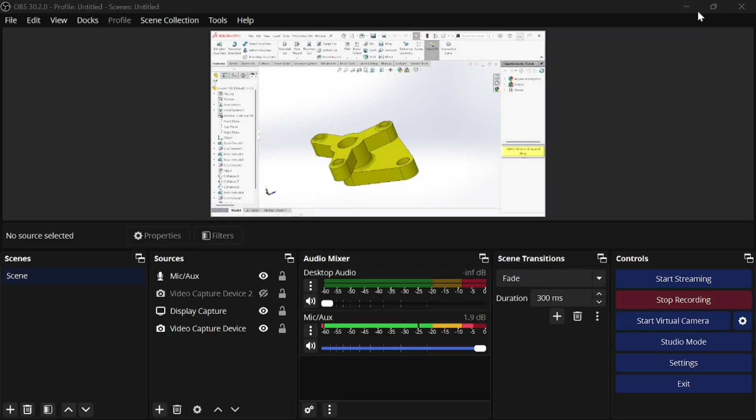Before starting how to make this model, we need to check the blueprint here. Let me show you the blueprint. I already had created a blueprint. This is the model number 108. So now here is the blueprint.

This one is isometric view. You always have to remember that this kind of section view is called isometric view. There's the top view, this is the front view, this is the right view, and this is the top view.

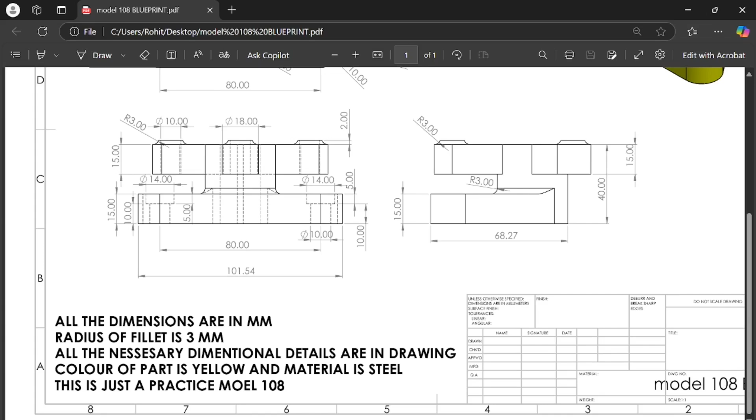So we have to start with the top, and we will create the cylinder whose height is around 40mm. Here all the dimensions are given. Now we need to read this thing all, let me zoom it out. Here all the dimensions are in mm.

Of course, the dimensions that you can see here are in mm. The radius of the fillet is 3mm. Which one is the fillet? Here you see in these 3 points there are fillets, and there is also one fillet here. In this part there is one fillet, and the radius of all this four fillet, 1 2 3 4, is 3mm.

Now the color of the part is yellow and material is steel. So the material that we are going to use for making this part will be steel, and the color that we will select will be yellow. Now let's start the video and let's start how to make this one.

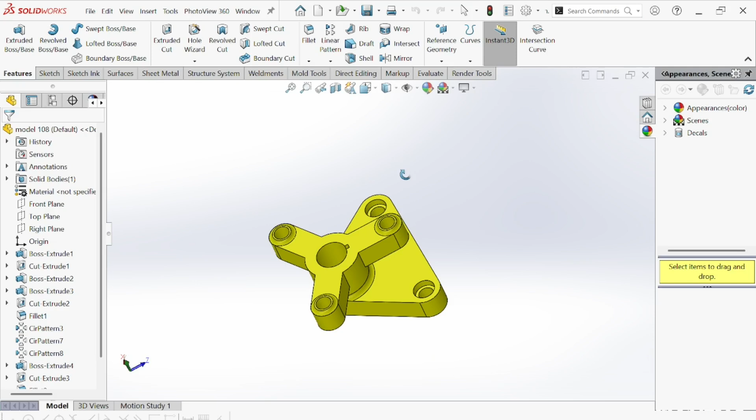So this is the model that I already had created, which I have shown in the starting of the video. So we have to close this one. Simply close this thing. Now we have to create a new one.

I already had told you how you can start a new project. Simply you have to go here, and you can also press Ctrl plus N on your keypad. Okay, so now you have to select the parts.

Now the most important thing that you have to keep in your mind is that before starting any kind of model, you have to work with the dimension. You have to specify a dimension in which we are going to work. So here we are going to select mmgs, millimeter gram and second. There are multiple options for dimensions, so we have to select mmgs, millimeter gram and second.

Okay, now this is one thing. Now we need to select a plane so we can start our project. So we have to select the top plane because we are going to create the cylindrical body first. So top plane and make a sketch.

If you are not able to select the sketch directly from here, then simply go here, click on the top plane, go to sketch, and here is the option for sketch. Simply you have to click on this option.

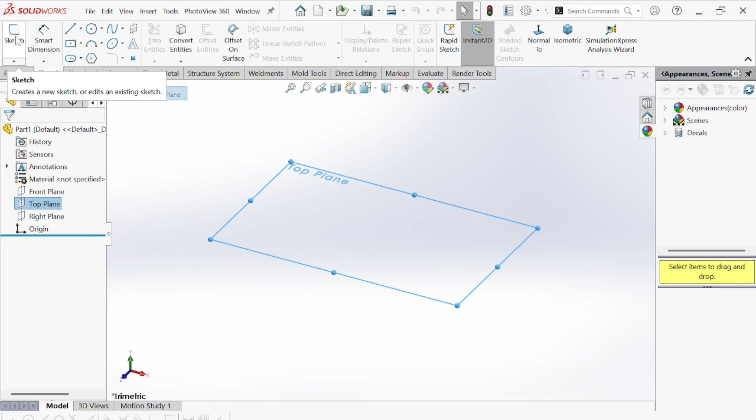Now here you see, now we need to make the cylindrical part. Here is the cylindrical part. Let me zoom in. Yeah, this one, and the height of this part will be 40mm.

But here you see, the cylindrical part, we have to make two circles, this circle and this circle. So the diameter of this circle - here the radius is given as 17.50 - so we will have to take the double of 17.50. So we will do some multiplication, and the radius of this one is 10mm, so the diameter will be 20. Okay, so let's start doing it.

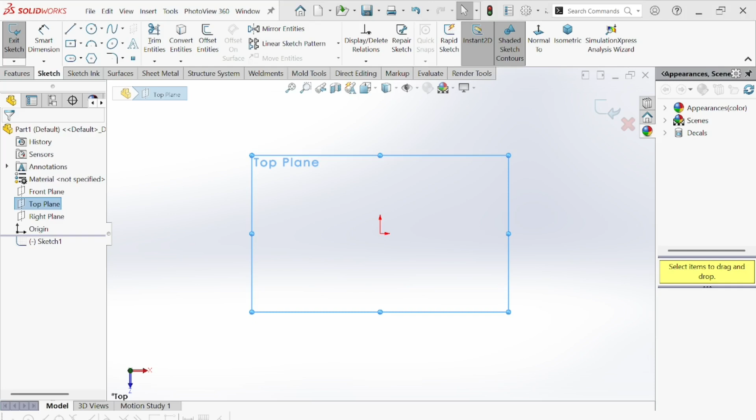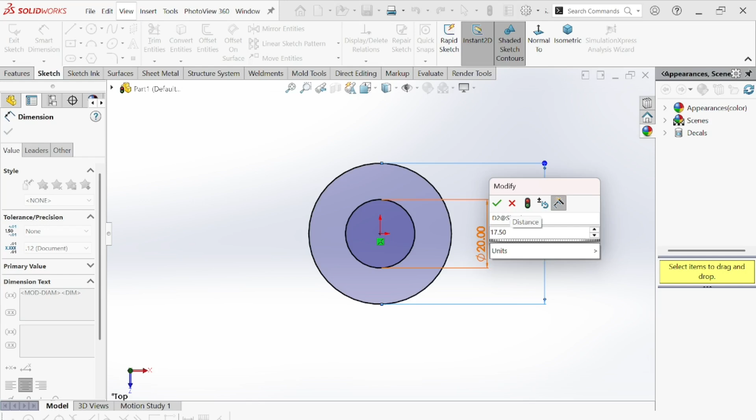Start to make two circles. Make this one 20, simply make this one 20. Now define the diameter of this one. The radius of this one here, see, this arc is 17.50, so simply make 17.50 into 2. Okay, and make this done. Here you see, 35mm.

Okay, now we need to extrude this thing, make a cylindrical part. So go to surface.

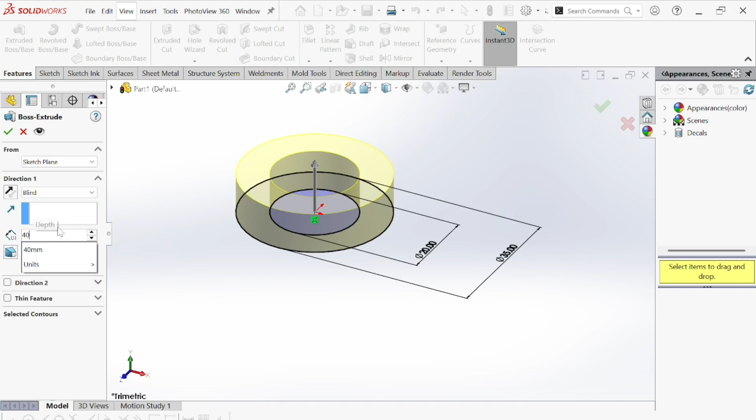Now go to extruded boss. Simply go to extruded boss, and here you can do two things: you can select mid plane, or you can select blind. Simply select blind and make this one 40. Now here you see this one is 40, extruded around 40. Simply make this one okay.

Now here you see our main profile is done. Now we need to make three parts, these three parts, and come down. The dimension of these three parts are given. So first we will do this one.

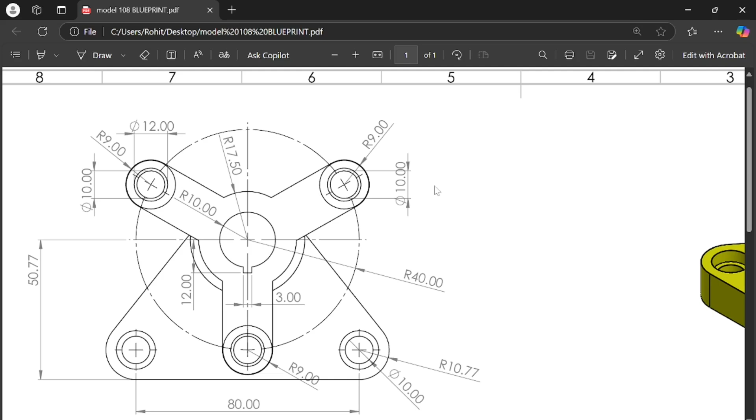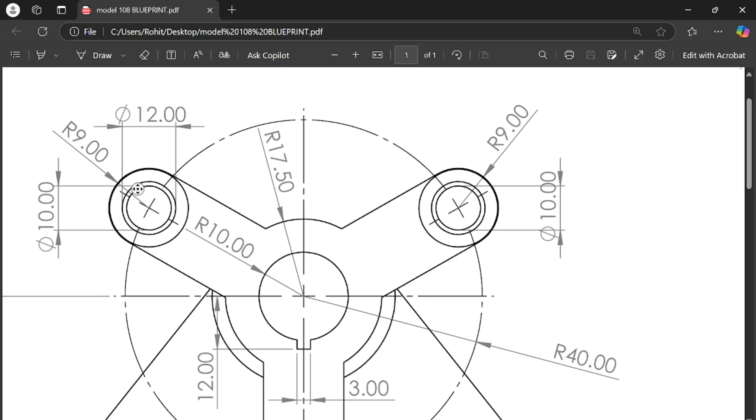Now here you have to do one thing. Let me zoom in. The radius of the outer curvature, this outer curvature here, two arcs, the radius of the outer curvature is 9. So we have to make this one as how much? 18. Okay, 9 plus 9 is equal to 18. And the diameter for the internal circle, which we are going to use as a hole, will be 10 mm.

Okay, so better to start with here. Let me zoom it out. Better to start with here, and then after this we will mirror this thing in three parts. Okay, so come here.

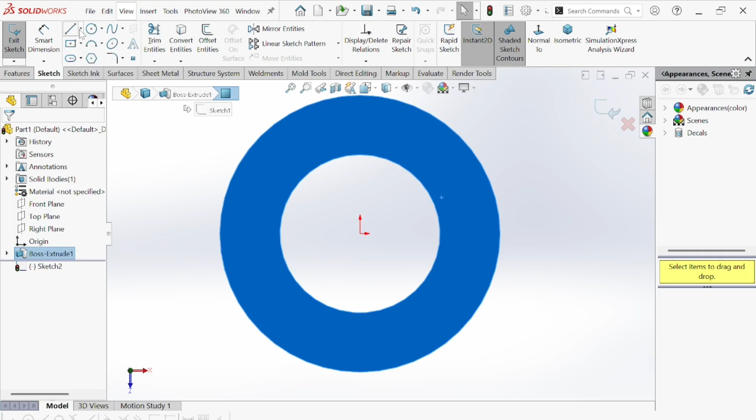Sketch. Now select center line, make a center line like this. Give the dimension of this center line.

The dimension of this center line is how much? Let me zoom it out. Here you see, we have to here you see, this construction circle shows you the dimension of this arc.

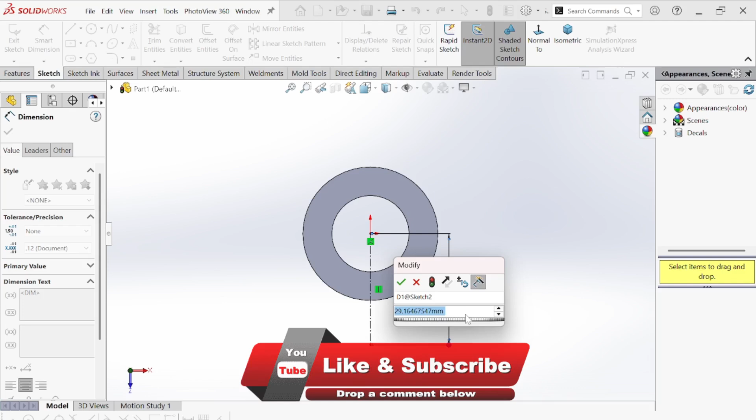Okay, so we have to take this one as 40, 80, because here you see radius is 40, so we have to make double of it. So we will take it as 80. Okay, so make this one 80. Let me check. It's going backward. Let's make this one 40. Okay, better to make this one 40. Let's make this one 40.

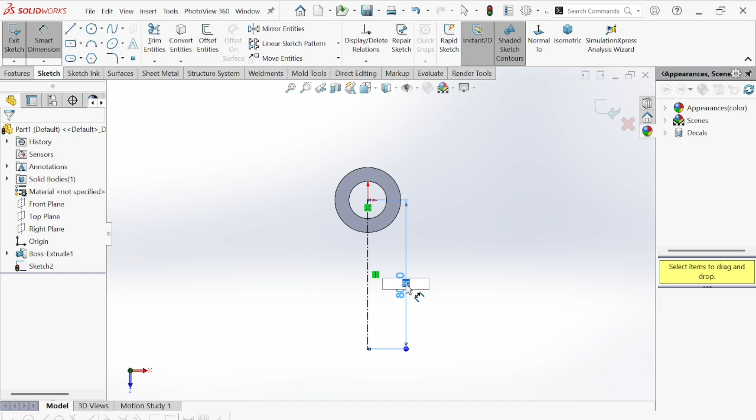But first let me check if any kind of dimension is given or not. So let's take it as 40. Simply take it as 40. Here you see this 40 is fine.

Again we need to make two circles, one circle and one more circle. Okay, now come here. The diameter of the internal circle will be around 10 - why? Because it is also given in the drawing. Here you see the diameter for the inner circle will be around 10 mm, and the diameter for the outer circle, this arc, the radius of this arc is 9, so we need to take double of it - 9 plus 9 is equal to 18. So we will take this one as 18. Okay, and make this one okay.

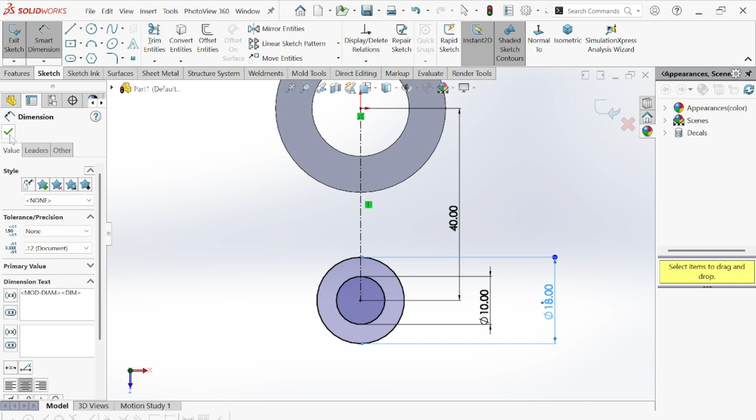And come here, select, click here. Now it gets turned into blue. Simply convert this as entity. We can also make a circle manually, but it's better to make this one as an entity.

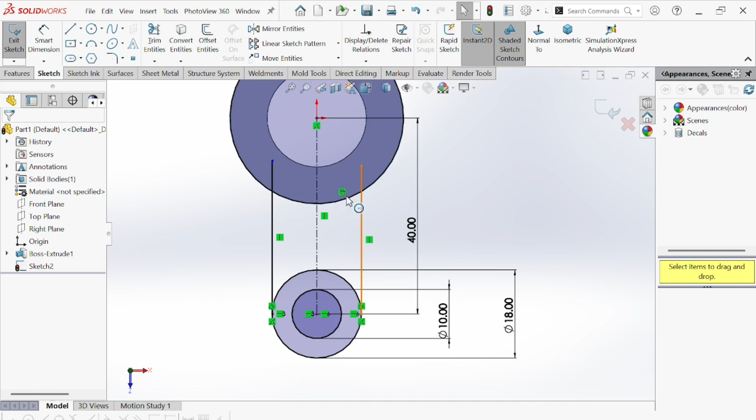Okay, now again come here, start from somewhere from here, this yellow point, make a line, make sure that the line will be vertical. Again make one more line, or you can simply mirror this thing. Why to mirror? Simply make this one. Now here you see, you have to make sure that the line will go inside of this circle.

Now here we need to trim some parts. Simply trim this part and also trim this one. Now here you see it get trimmed.

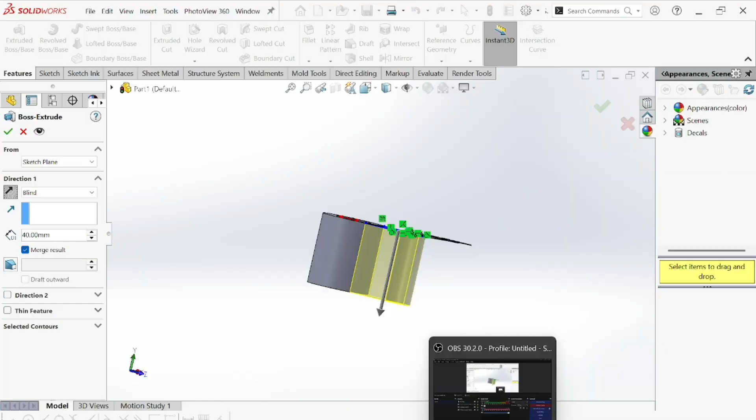Go to feature, go to extrude boss base. But we need to extrude this one in backward direction. Simply change the direction. And how much we need to extrude? Come here, we need to extrude this one around 15 mm. So make this one 15. Okay, and make this one done. Now here you see, why 15? We need to extrude this one around 15 - the thickness of this part is 15.

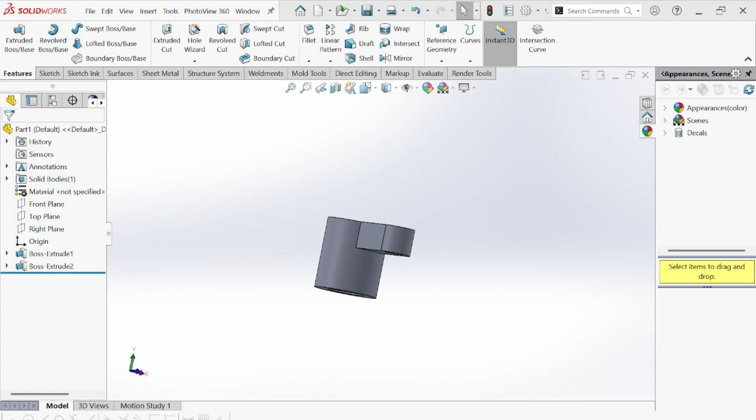Okay, now we need 3 copies of this part. Okay, so come here, but first let's make a sketch. Let's make some more things on it. Simply come here, find the origin point of this circle and make a circle like this.

Bigger than this circle. Now come here, and here you see the diameter of this circle, the middle circle, is 12 mm, and how much we need to extrude this thing? Around 2 mm. Here you see 2 mm. So 12 and 2. Come here, make this one 12.

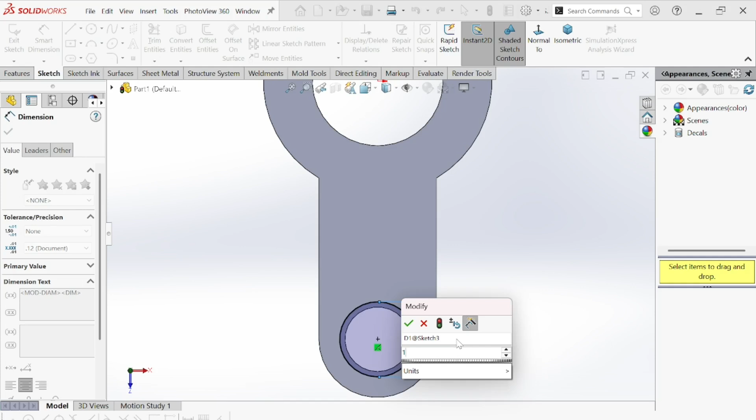One more circle. Otherwise, we need to go and select extruded cut. We need to make a hole here. So better to make a circle right now. Now no need to define the diameter of this circle, because there is already a circle here. We just needed a copy of this circle.

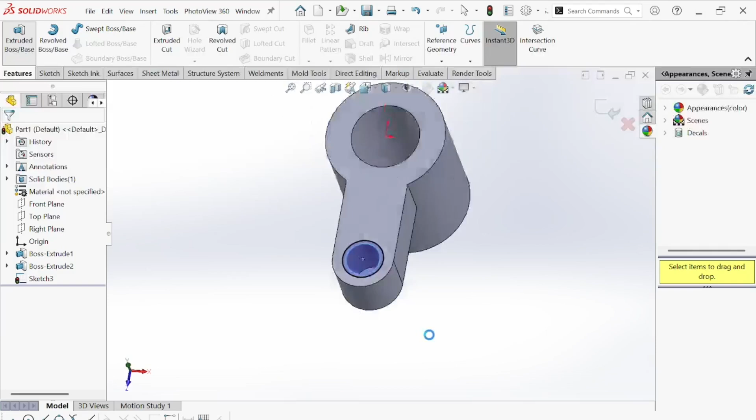Now go to feature, go to extruded boss, and how much we need to extrude? Simply give dimension 2 mm and make this one okay. Now here you see, no need to do anything. Simply come here, we need 3 copies of this thing.

Here you see 1, 2, 3, 1, 2, 3. So we need to make 3 of it.

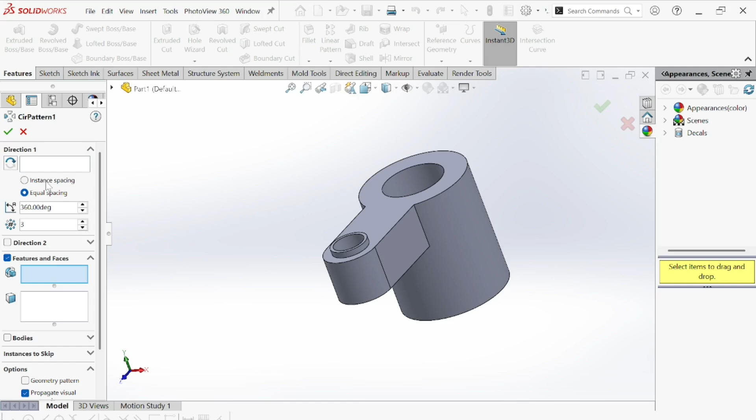So in the feature section, you have to go to circular pattern. Simply go to circular pattern, select this one, go to direction, select this one. Here you see, and also select this one, and go to extruded boss base, and also select this part. Now here you see, everything is done.

Simply make this one okay. Now you see. Now let's make the fillet here. Go to fillet and set the radius of the fillet. How much was the radius of the fillet?

The radius of the fillet is 3 mm. So give dimension 3. Select this one, select this corner, and also select this corner, and make this one okay.

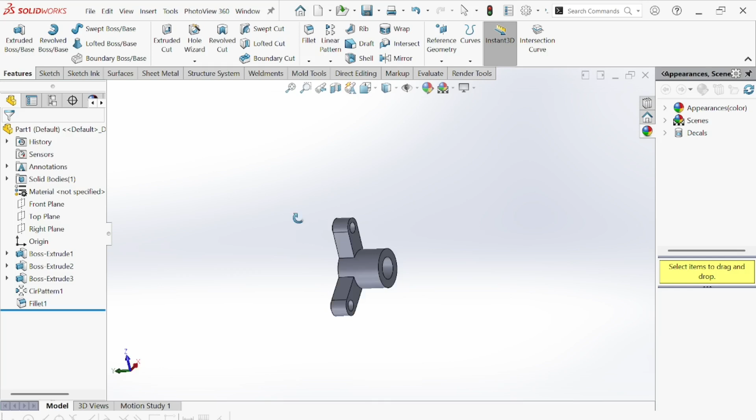Now here you see the upper part is ready. Now we need to make the lower part. So how? Now we will start from here. Simply select this part, click here, and make this one a sketch.

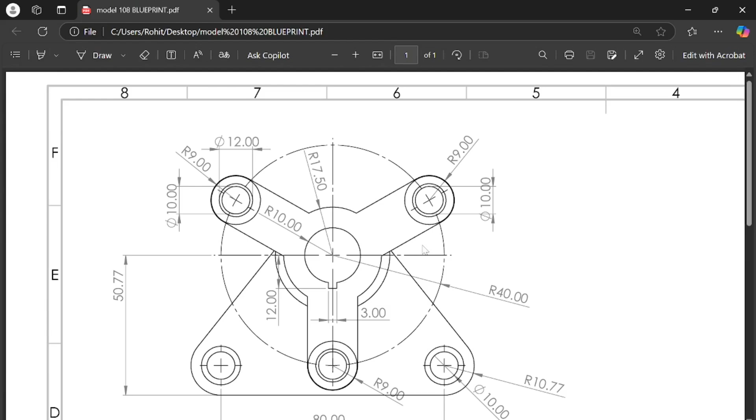Everything is done. Let me do one more thing. And yeah, this one looks perfect. Now what do we need to do? We need to make this part, this profile.

Okay, simply convert this as entity. Come here, select construction line, drag it down.

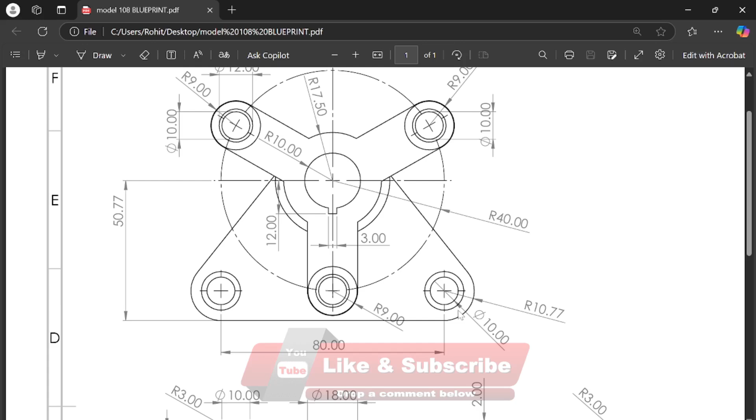Now what do we need to do? We need to define the overall dimension, right? The overall dimension - so the overall dimension is how much? It's 50.77. Here you see 50.77, and here you see...

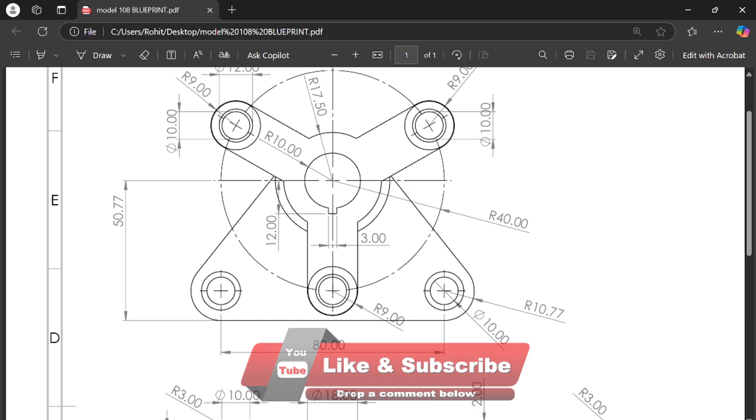50.77. Let me do one more thing. 50.77. Yeah, here you see the radius of this one is 10.77. So we need to minus 10.77 out of 50.77, so it will automatically become 40. So the actual dimension from the center point to this point is around 40 mm, right?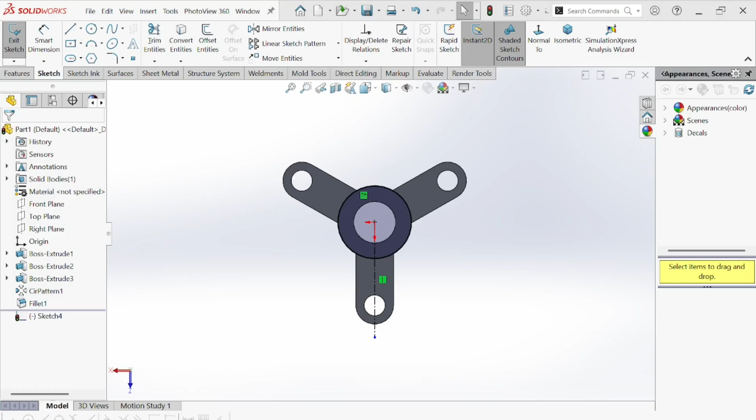40 mm. So come here, give dimension 40 mm, simply means 40. Okay, again one more thing we need to do.

From the center point, make a left or right one more circle, one more line. Now what do we need to do? Here you see the overall dimension, the main gap between this center point and this center point is 80.

So we only need to take half of it, so we will take it as 40. Here you see 80, we need to make half of it, so we will make it as 40, right?

So come here, dimension, make this as 40. Okay, now again we need to make one circle, right? So now the radius of this arc is 10.77.

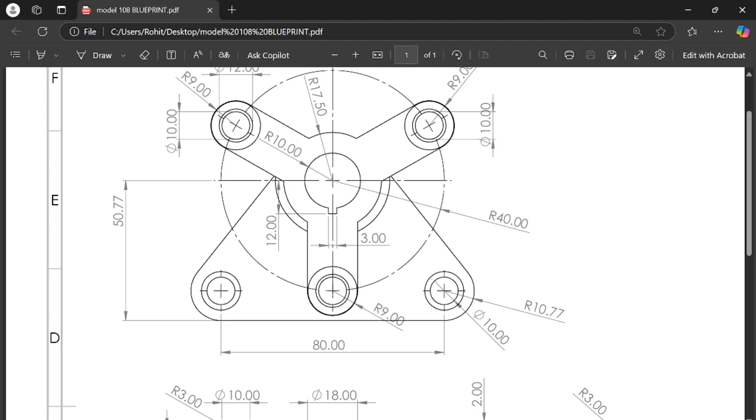So we need to make double of it. So what is the double of it? Let's calculate. Come here, dimension, smart dimension 10.77, right? So 10.77 multiplied by 2, and done.

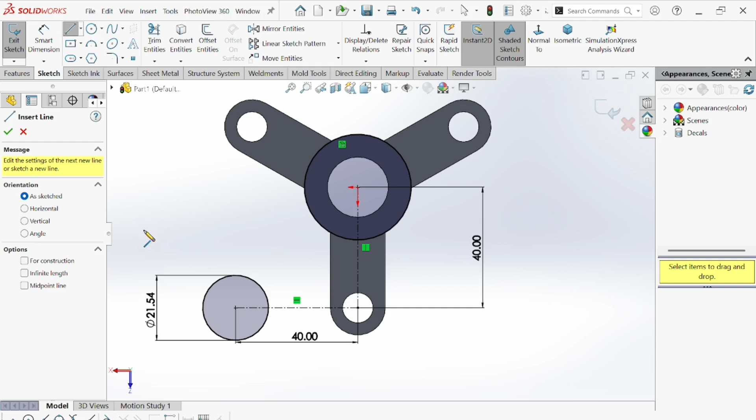21.54. And again, come here, select geometry line, start from here and touch it somewhere here. Now here you see the relation is already done, which is tangent. Here we already have one relation done, which is tangent.

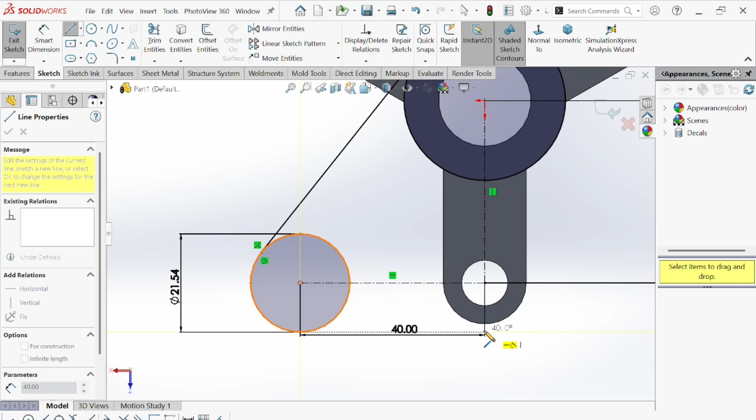Now no need to do anything. Just from this point, make a line like this, which connects exactly in the middle of it, and make it done. You can also drag it here.

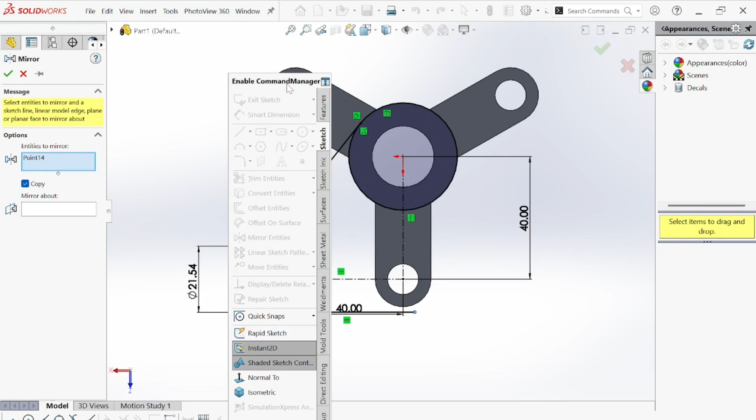It's absolutely fine. Now we need to make a copy of it. So how? Go to mirror entities. What's wrong? Something's wrong, something's wrong.

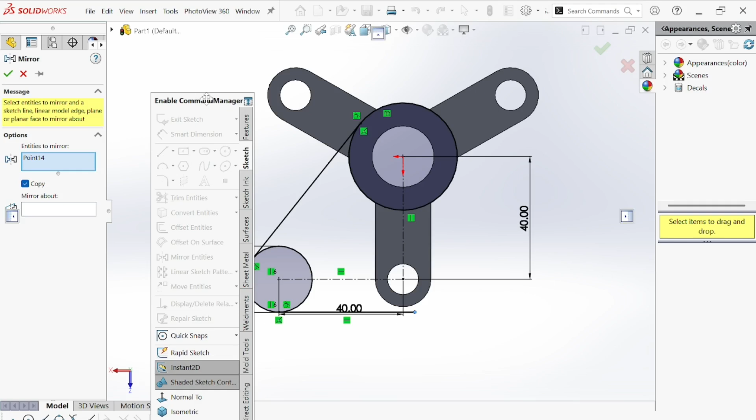What happened? Feature, sketch, feature, sketch. Let's put it here. Okay.

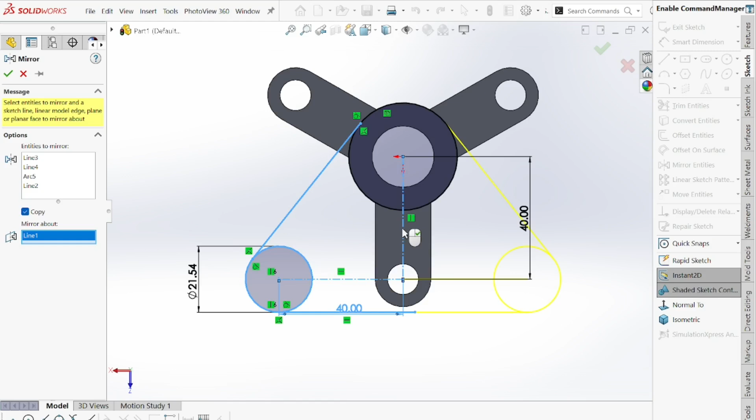Now again, select everything. Okay, go here, find in a sketch. You have to find mirror. Simply find mirror, go to mirror about, select this center line, and make this one okay. Now here you see everything is done.

Now again come to trim entities. Trim this thing, trim this thing. Trim this one, trim this one also. Now trim - I think trim this one.

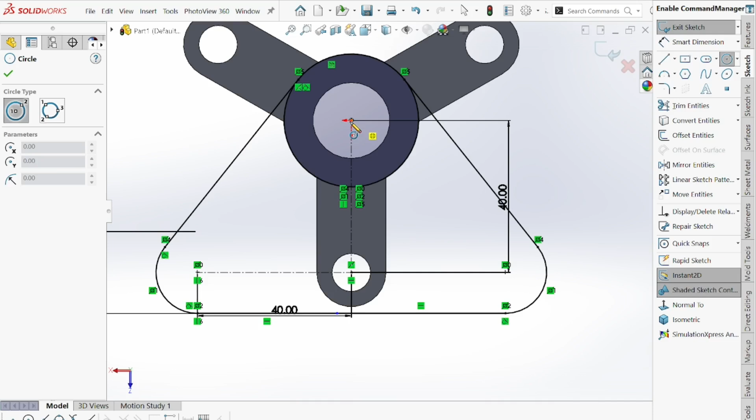Now again select line and connect this line to this line. Again we need to do some more things. Go to circle with the center point, make a circle here, right? Now trim entities and simply trim this thing. Now everything is done, make this one okay.

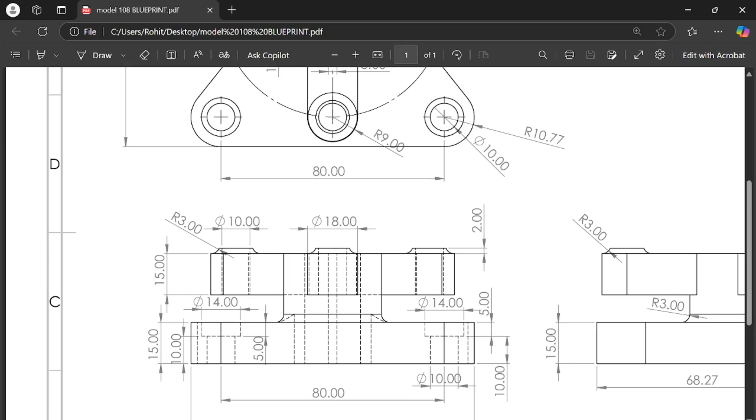Now go to feature and select extruded boss base. And how much do we need to extrude? Change the direction, and how much do we need to extrude? We need to extrude this one around 15 mm, also in upward direction. Okay, in upward direction, so give dimension 15. Okay, and make this one done.

Now here you see. Now we need to make holes here. But let me do one thing. Now we need to make two holes here, right? One here and one here.

So I'll go to the feature section, go to hole wizard. This time you have to select the first option. Simply select first option.

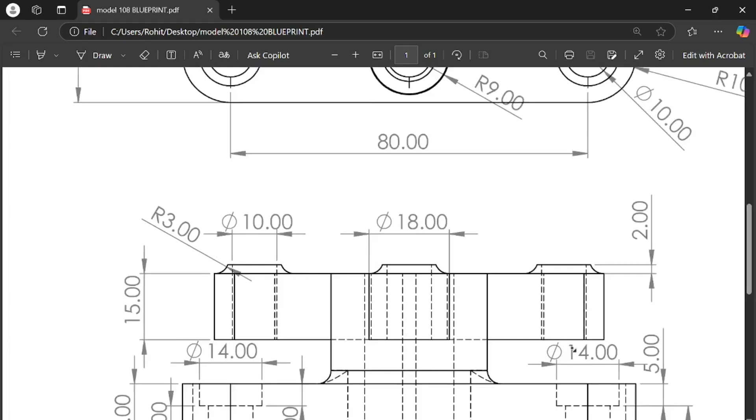ISO is fine, so you have to keep it ISO. Now come here. The diameter of the hole is 10 mm. Let me zoom in so you can see it clearly. The diameter of this hole is 10 mm. Okay, so go through all.

Select M10, not M5. Now, head clearance - how much was the clearance? It's 14 mm, and the depth of this part is 5 mm.

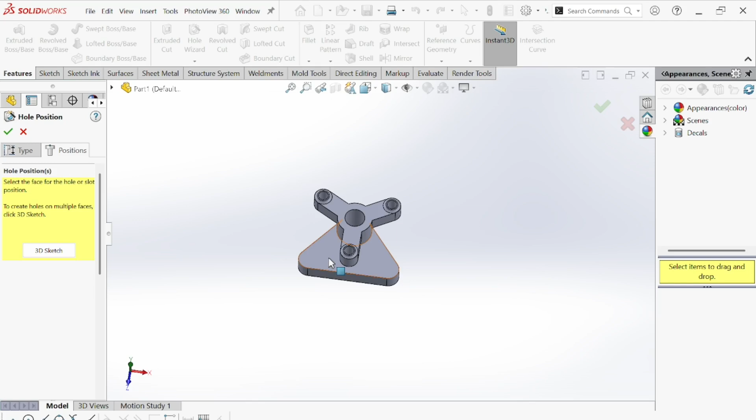Now go to position, select this part, make this one here and this one here. So this is wrong. Let me try it again, otherwise we will do it manually.

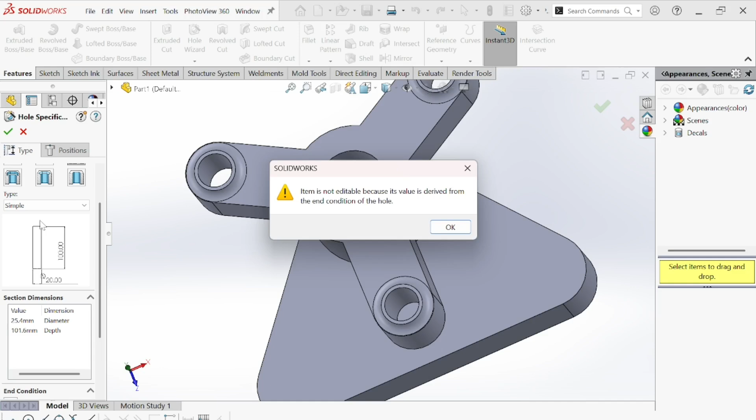Go to hole wizard. Let me select this one - this sixth option. Now here you see, through all, diameter - come here. Depth, simple C-size drill. Here you see multiple options, tapered, but let me select this one. Now here you see, I think this option is fine.

M10, head clearance, make this one 5. And this one make 14. Here you see, under head countersink 90. This time let me try.

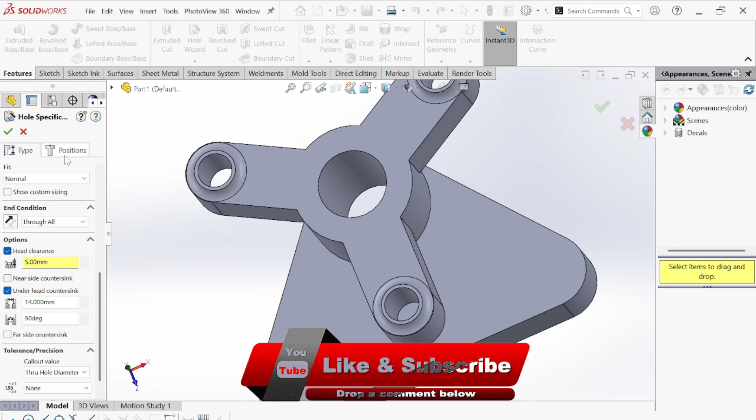Go to position, select this one. It's again happening like this. So okay, let's do it manually.

Go to hole wizard, select this one. This one has diameter 10. Position this on the face, find the origin point of this arc and also the origin point of this arc, and here is a hole. Make this one done.

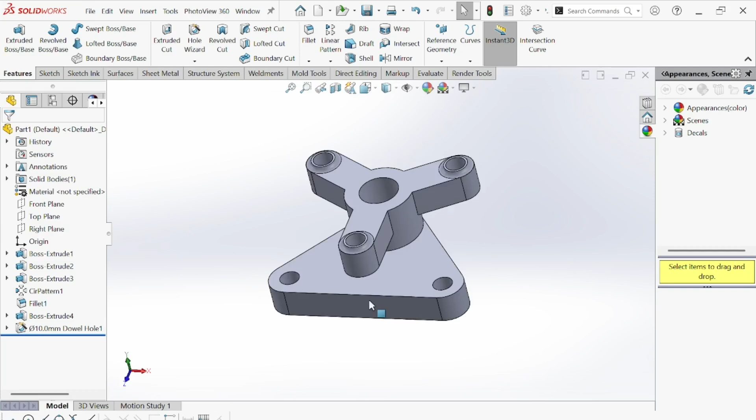Now here you see, again go to hole wizard, again this third option. This time we will take it as how much? Okay, let's leave it, let's do it manually.

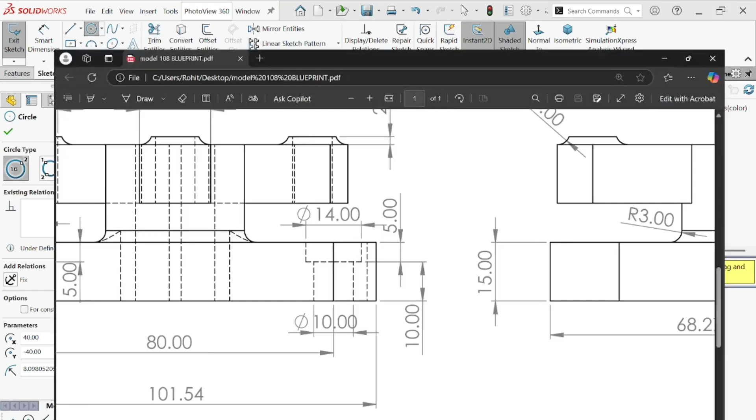Again, come here, find the origin point of this circle, find the origin point of this circle also. Now here you see the gap of this thing is 14 mm here - the diameter of the head is 14 mm, and the depth of this head is 5 mm. Okay, so make it okay.

Select both the circles, make relation equal. Through this, you can define the diameter of every circle. Here are two, but you can also use this for multiple circles. Now go to smart dimension and make this one 14.

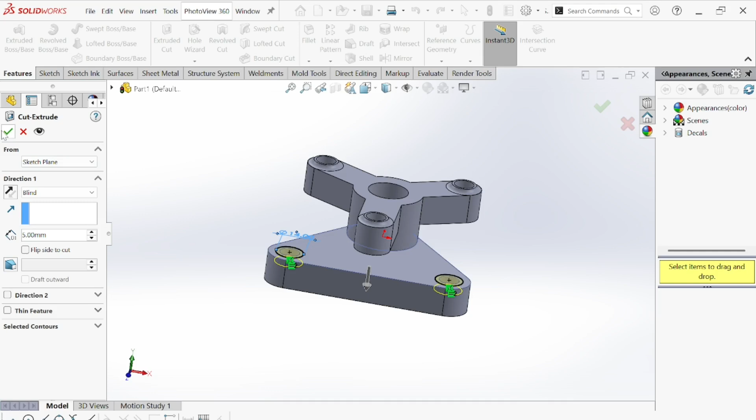Go to feature, go to extruded cut, and how much? This is not 5, just make it 5, and make this one done. Now here you see, here is the part.

Now here we need to get the fillet. The radius of this fillet is 3 mm. So go to fillet, 3 mm, select this corner and make this one okay. Now here you see, it's done.

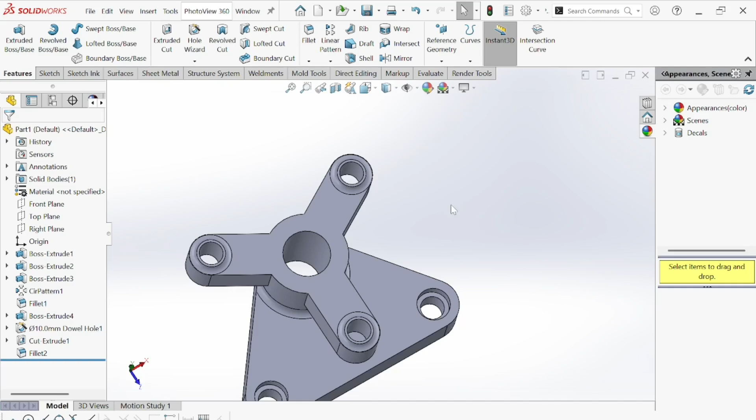Now we need to make this keyhole here. So again, you have to find the center rectangle. Select center rectangle, find a point here. Here you see this point. Make a rectangle like this.

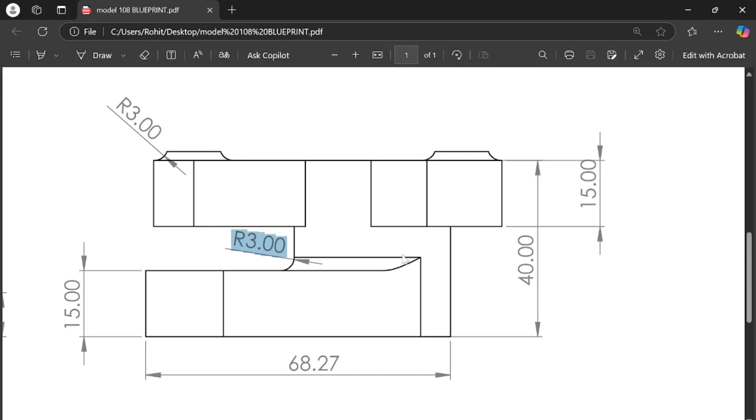Now we need to define the dimension. So select this point, select this line, and the dimension is - let me zoom it out. Here you see 12 mm.

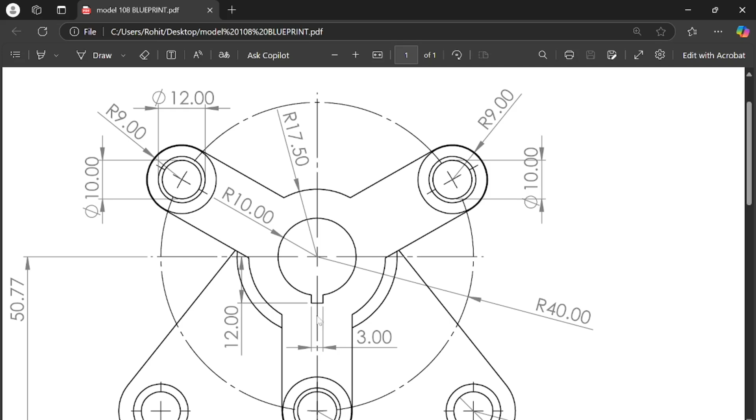From the center point, the dimension of this line is 12 mm, and the thickness of this part, from this line to this line, is 3 mm. Okay, so make this one 12 and make this one 3.

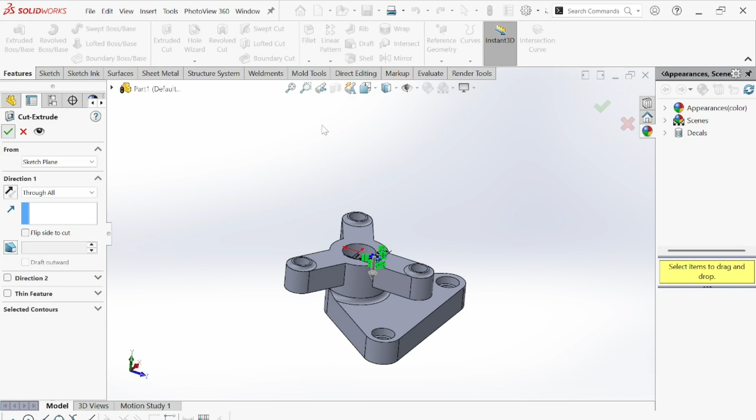Simply go to feature, go to extruded cut, and this time you have to select through all, not blind. Simply select through all. Now here you see, and make this one okay. Now here is our final model.

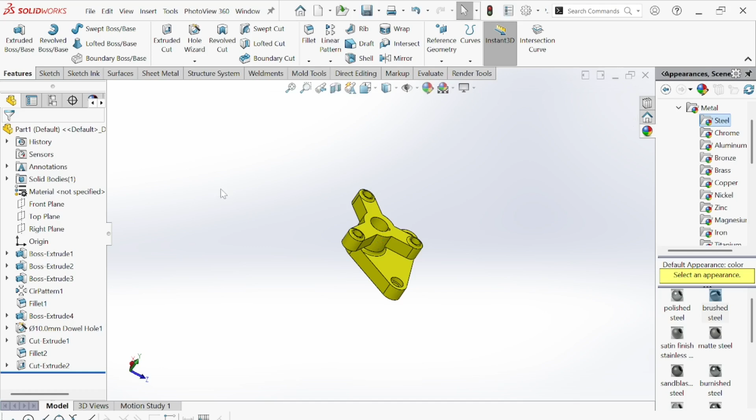Now let's select material. Go to metal, steel, select this steel, go to edit appearance and give it material yellow. Now here you see, done. So here is the final part.

Here you see, here's our final part. So I hope that you liked the video and enjoyed it. This is just a simple practice model.

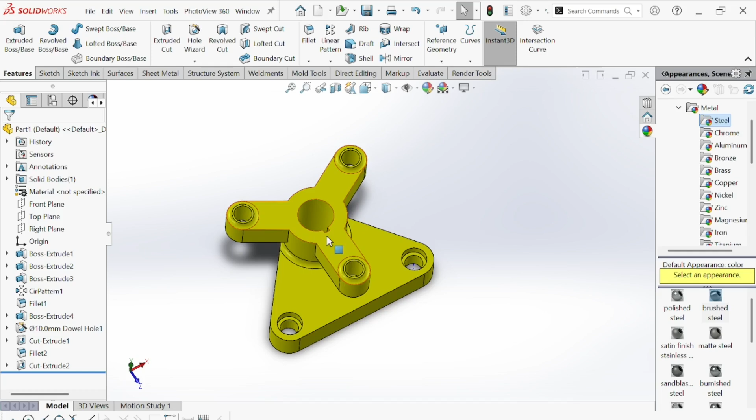No need to worry about a lot, you can also practice it on your own. This is a simple model in which I used multiple tricks. Actually, I got some problem making this hole, but I did it manually. You can also do it manually.